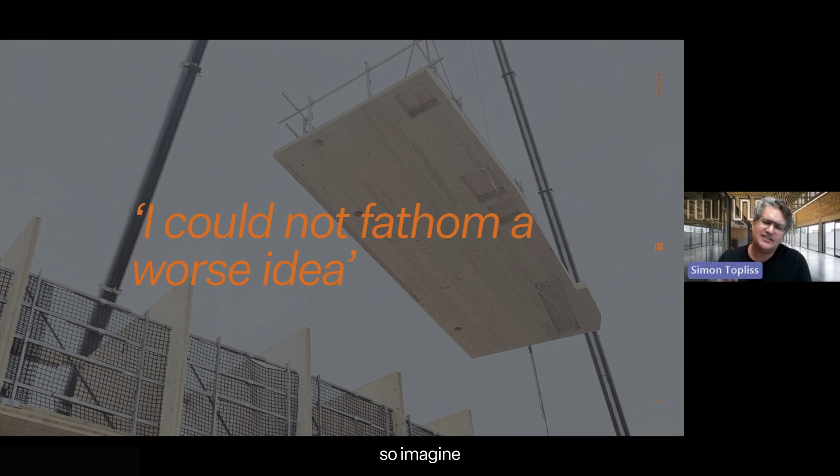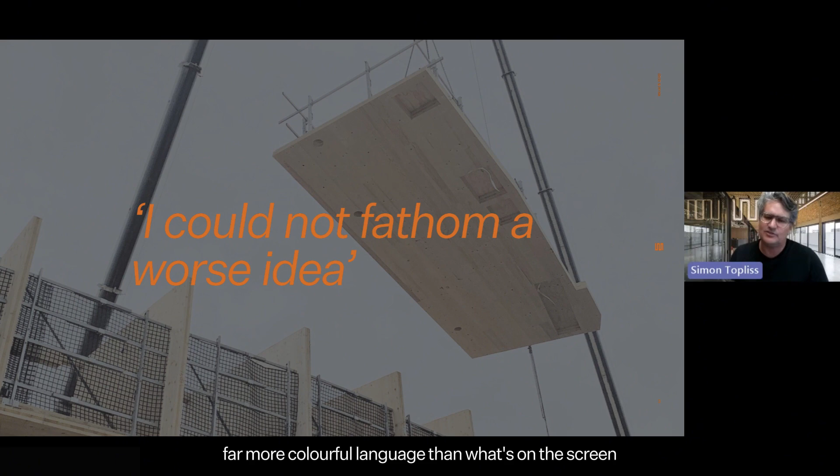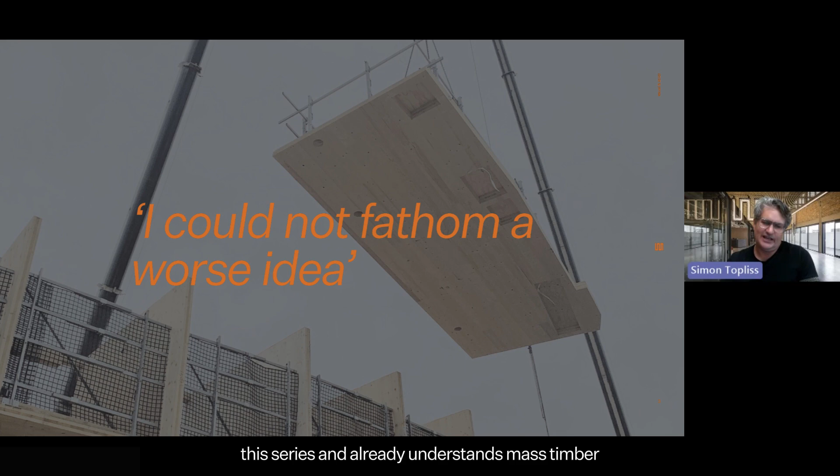So imagine you're sitting beside me in the project meeting where cost is being aggressively interrogated on every front. And Daniel, the QS, leans back and says, in far more colourful language than what's on the screen, I cannot fathom a worse idea than using this. But here we are amongst timber friends in this room, this series, and already understands mass timber, I hope, or at least wants to go on that journey.

Its design challenges, structure, fire, carbon, prefabrication. And hopefully you don't need convincing. The real issue is this. In Australia and New Zealand, the construction industry is not set up yet to say yes to timber. But we are set up to say yes to what we already understand, to what we can benchmark, to what we can price quickly, to what feels safe.

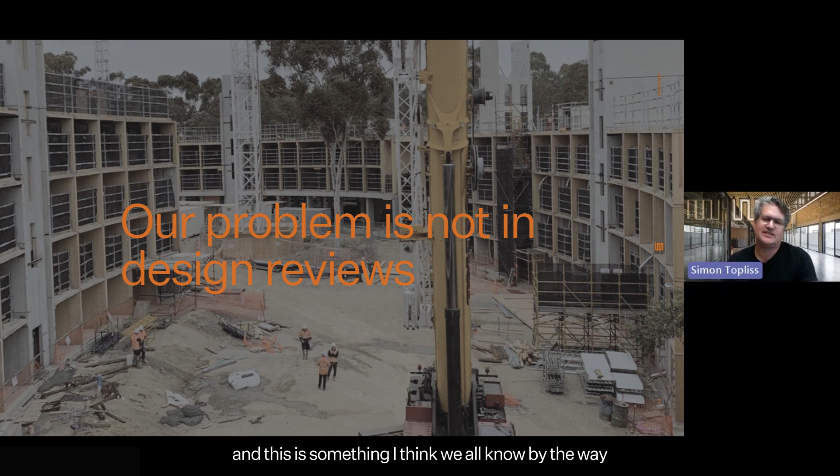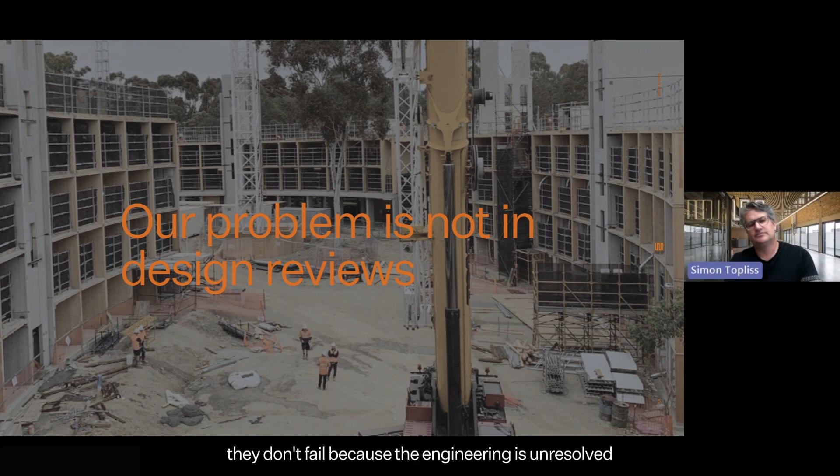And here's the uncomfortable truth, and this is something I think we all know, by the way. Timber projects don't fail in design reviews. They don't fail because the details are wrong. They don't fail because the engineering is unresolved. Timber is lost in boardrooms. Timber fails when the conversation shifts from design to risk, from intent to cost, from possibility to lack of certainty.

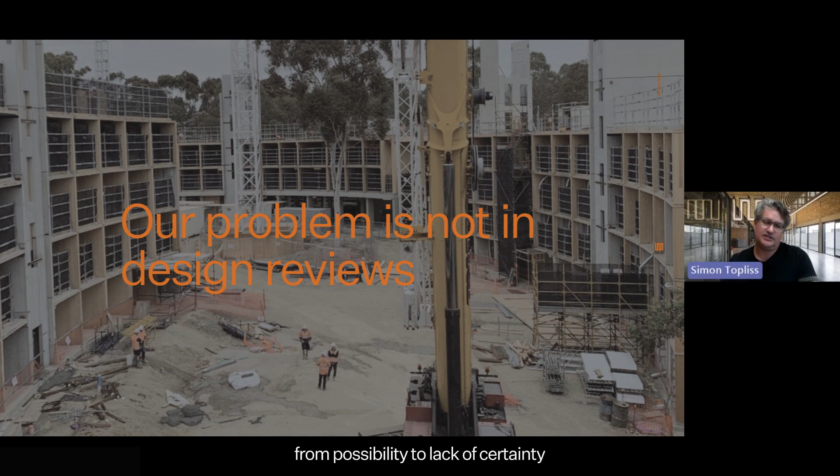And so on our journey over the last few years with Daniel, the QS, and others who have since followed, we realized that we needed to stop trying to convince people that timber was good, because that argument doesn't cut through the board report. So instead, we asked a different question. What if timber isn't the hard part? What if risk is, cost is, approvals are? So this talk is about designing for the reality of our industry and the tools our teams are using every day to navigate mass timber from design to reality.

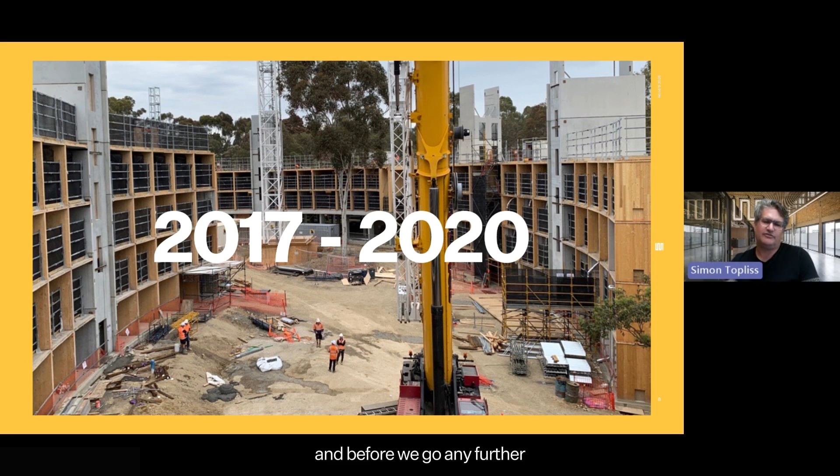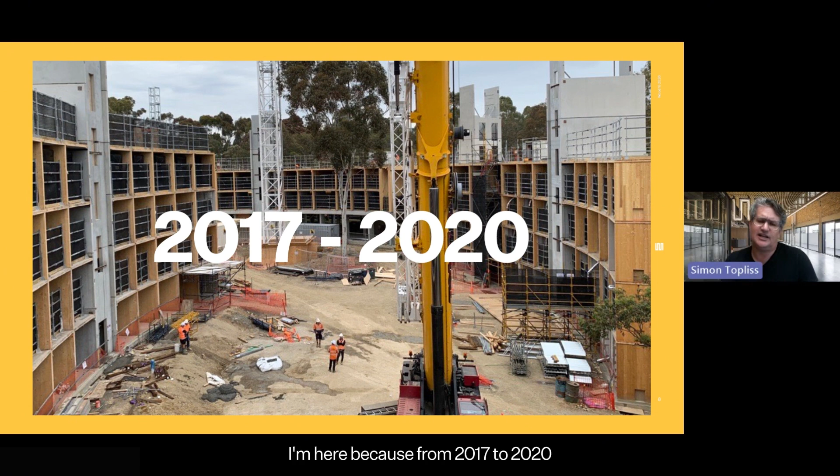And before we go any further, I want to be clear about where I'm coming from as an architect. I'm not here to speculate. I'm not here to sell an idea that I haven't tested in the market. I'm here because from 2017 to 2020, I led the architectural design teams at JCB Architects that delivered two of Australia's largest residential mass timber projects.

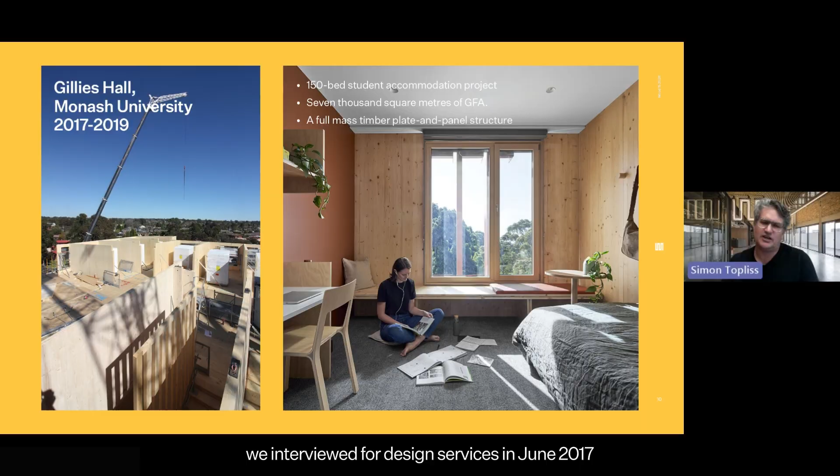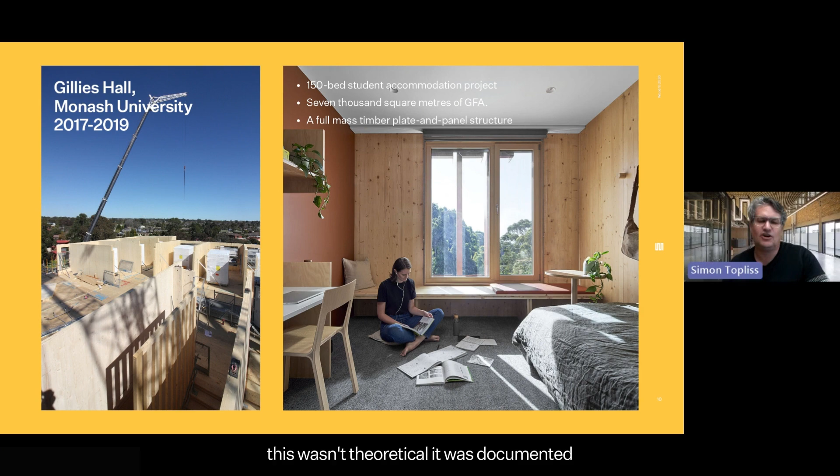Gillies Hall, a 150-bed student accommodation project for Monash University, 7,000 square metres of GFA, Australia's largest passive house certified project when built, complete with a full mass timber plate and panel structure, supplied out of Italy and built by Multiplex. We interviewed for design services in June 2017, and students moved in 20 months later in February 2019. This wasn't theoretical. It was documented, costed, tendered, built.

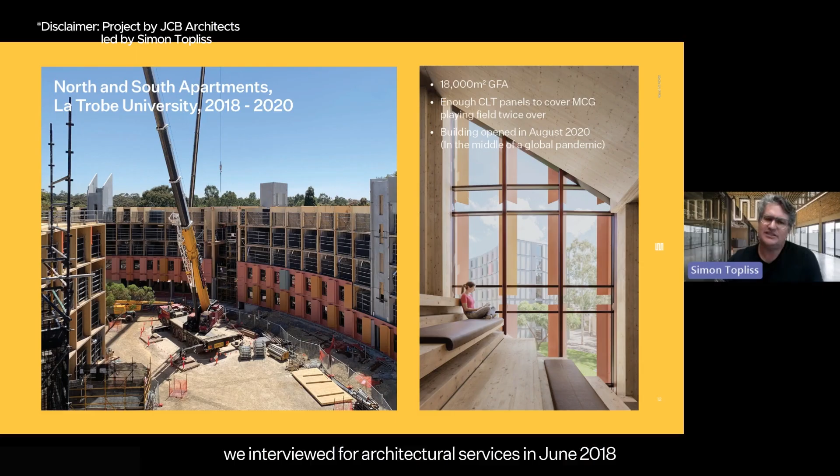And following that, La Trobe University's North and South apartments, nearly 18,000 square metres of GFA, a CLT panel and plate structure supplied and built by the same team. We installed enough CLT panels to almost cover the MCG twice over. It felt like we had changed the playing field. We interviewed for architectural services in June 2018, and the buildings opened 26 months later in August 2020, in the middle of the global pandemic.

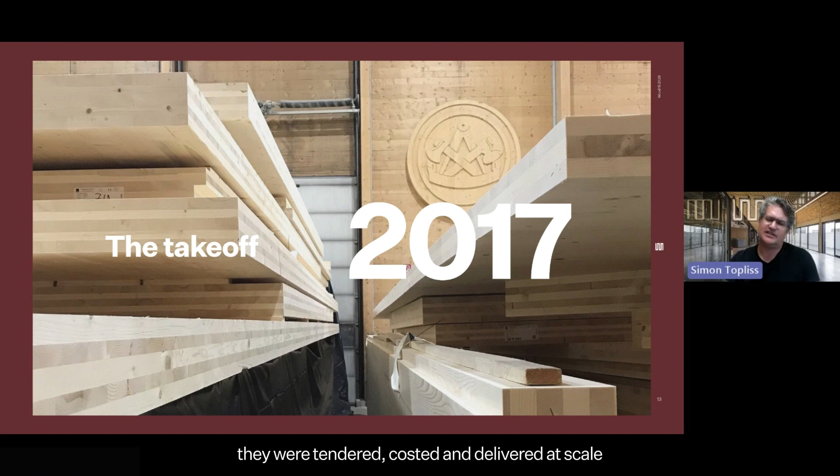We may not have had students to sleep in their rooms, but we were operational. And that matters because it really proved something about certainty. These weren't concept projects. They were tendered, costed, and delivered at scale. What started in 2017 on my visit to a factory in Italy became two of Australia's largest mass timber buildings. In La Trobe and Monash University, we had clients who were willing to back innovation and carbon leadership.

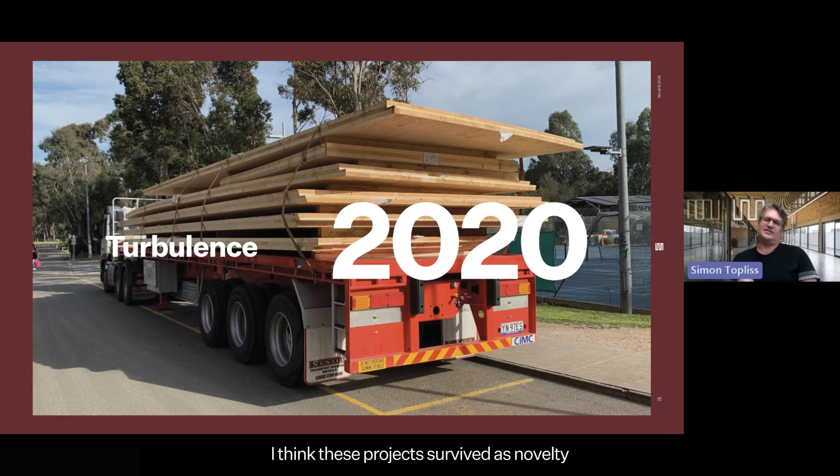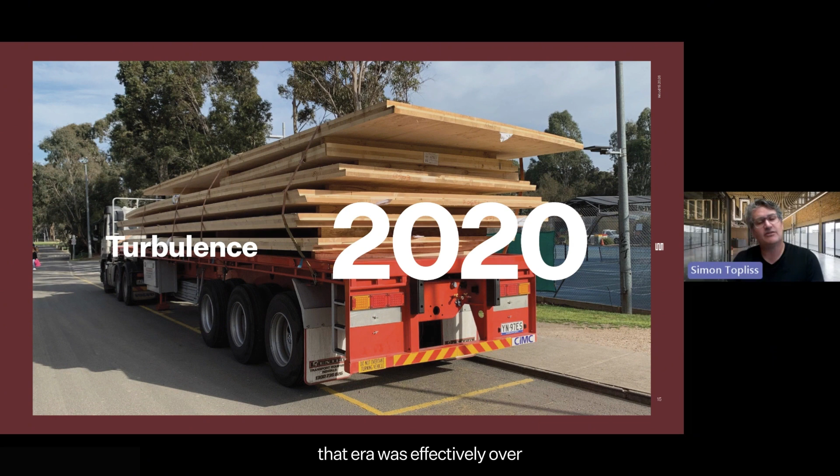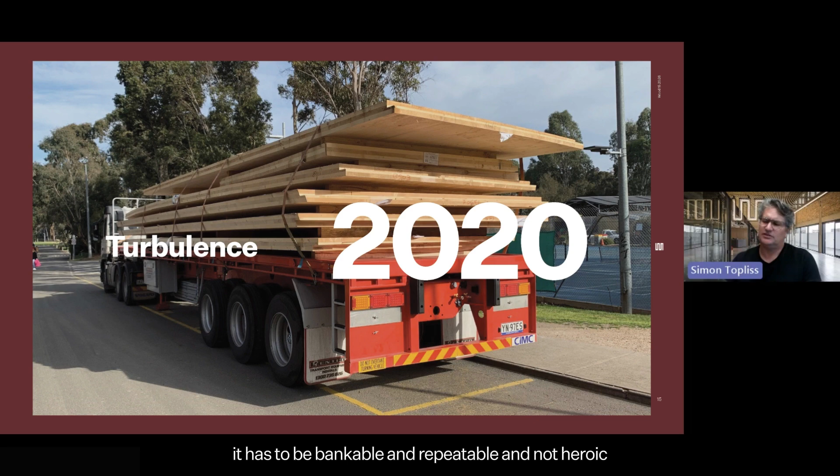What I underestimated was how hard the real world pushes back once the novelty wears off. And on reflection, I think these projects survived as novelty, one-off buildings, backed by exceptional clients, delivered under very special conditions. By the end of 2020, with La Trobe complete, that era was effectively over. When I left JCB and joined WAM, one thing became clear. If mass timber is going to matter in the real world, it has to be bankable and repeatable and not heroic. And if that sounds theoretical, let me ground it.

Because once novelty is gone, the only thing that matters is whether timber can survive normal market conditions—multiple projects, different clients, different cities, real scrutiny. And in my first few years here, we lost timber on projects.

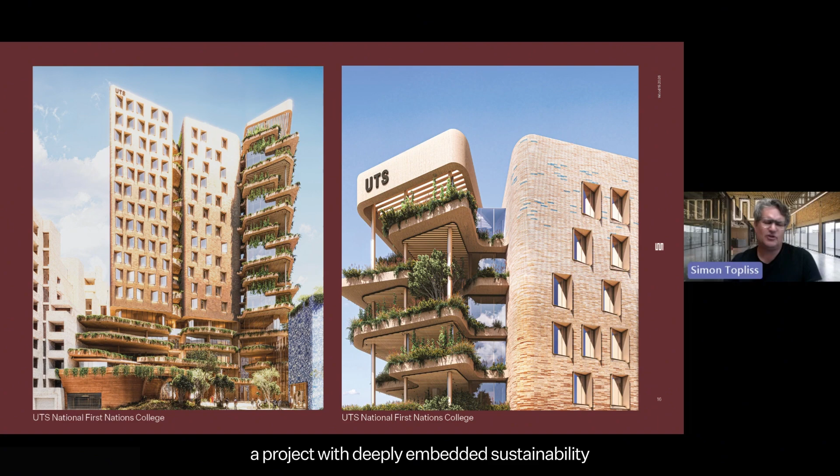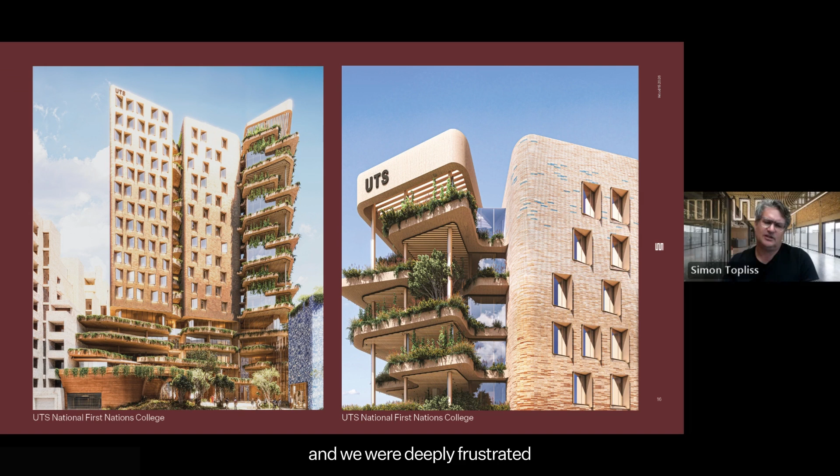The UTS First Nations College, a project with deeply embedded sustainability aspirations, where timber should have been straightforward, was met with a firm market response: there is no appetite and too much risk. We were deeply frustrated, but we've stayed true to course and navigated our way through. And I think we are now seeing a big shift in the market.

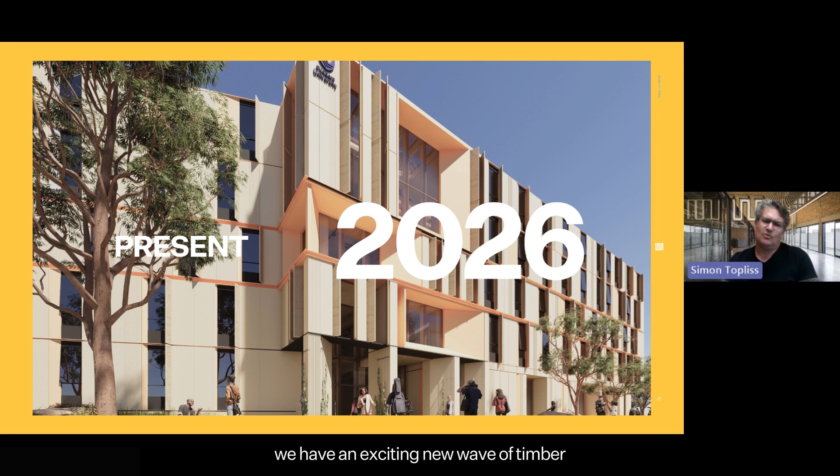So I want to share a little of what we have underway, but more importantly, what tools we're using to get there. We have an exciting new wave of timber residential projects, and they begin to go on site at the end of this year, 2026. Large scale and market tested timber projects.

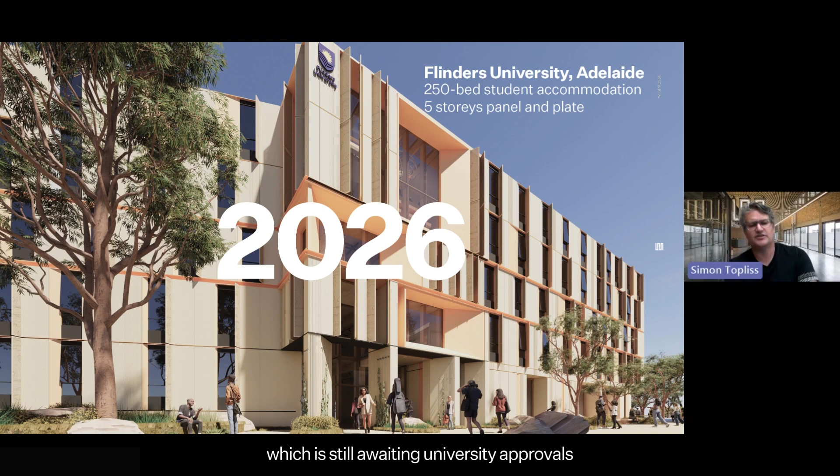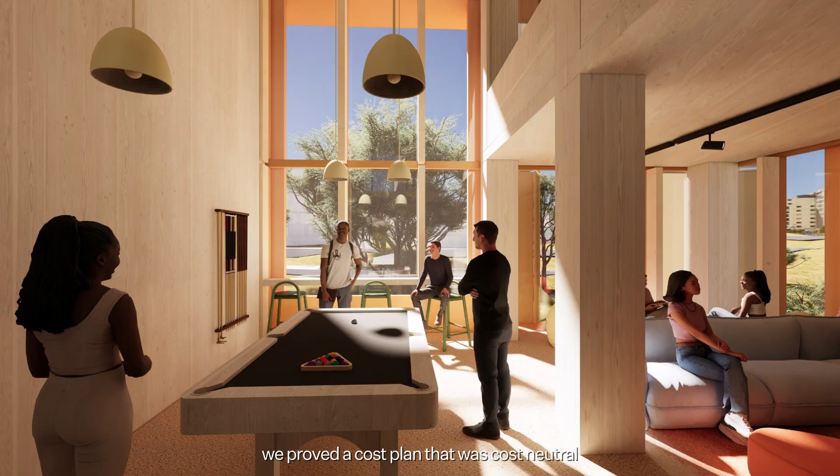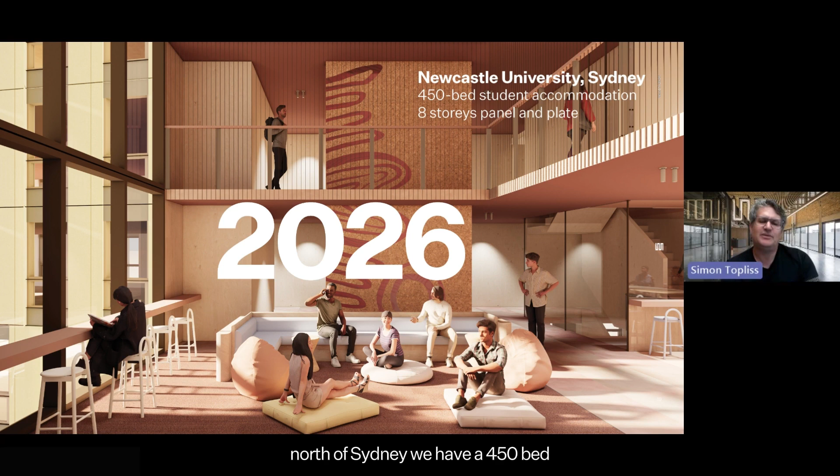North of Sydney, we have a 450-bed student accommodation project for Newcastle University out to tender. Again, full CLT structure. A cost plan that wasn't even initially close to working for timber—we turned it around to be neutral. And we understand that builders who are pricing it are incredibly receptive to the approach we've taken.

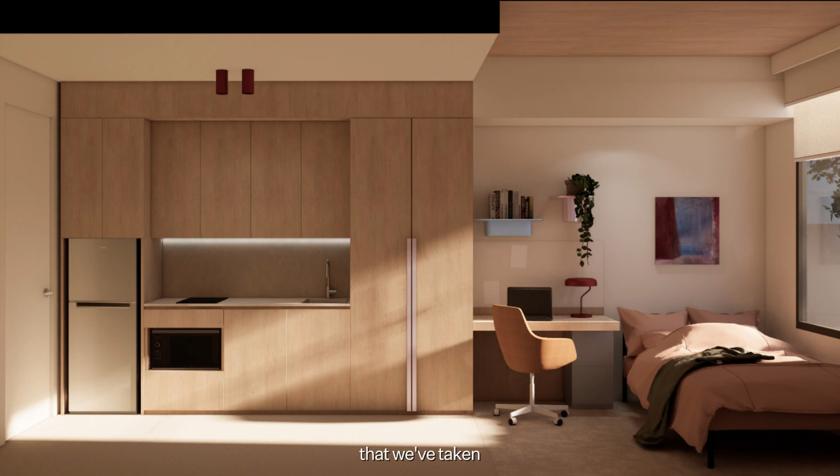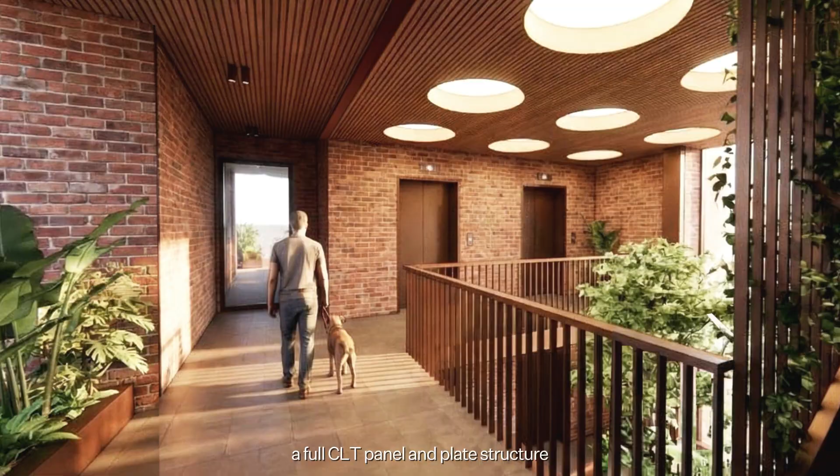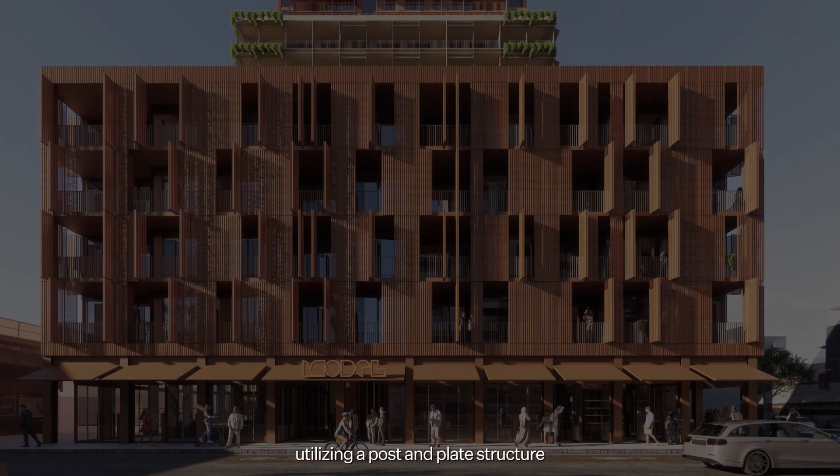And in Melbourne, we're working with Model, a client absolutely committed to changing the sustainability story. The Cordial Factory: 155 build-to-rent apartments, a full CLT panel and plate structure. And for the same client, 276 Johnston Street: 225 build-to-rent apartments over 17 storeys, utilising a post and plate structure. Both aim to be on site by the end of this year.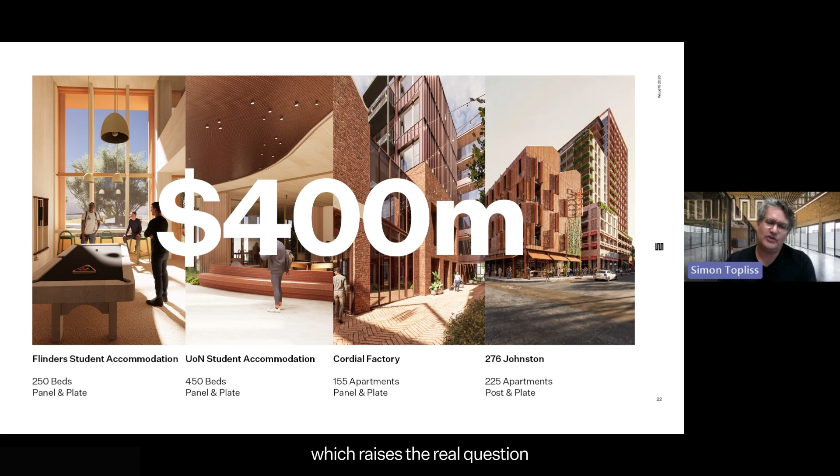Combined, that's almost $400 million worth of mass timber projects. This isn't a highlight reel. For us, it's momentum, and we believe real change—which raises the real question: where are all the other projects? Why do so many good timber projects still fail in 2026?

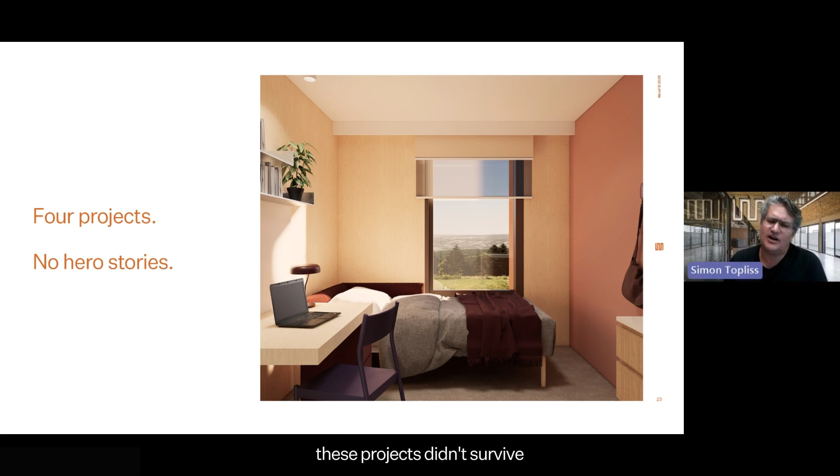These projects didn't survive simply because the clients were enlightened. They didn't survive because our teams were braver than everyone else. They survived because we worked the problem. These are large, real, market-facing projects. And trust me, we almost failed.

They were costed poorly. They were challenged without the right facts. Our credibility was seriously questioned. Cost panic, installation anxiety, supply chain fear, wild assumptions. None of this was about structure. None of this was about design. None of this was about fire. None of this was about whether timber really worked.

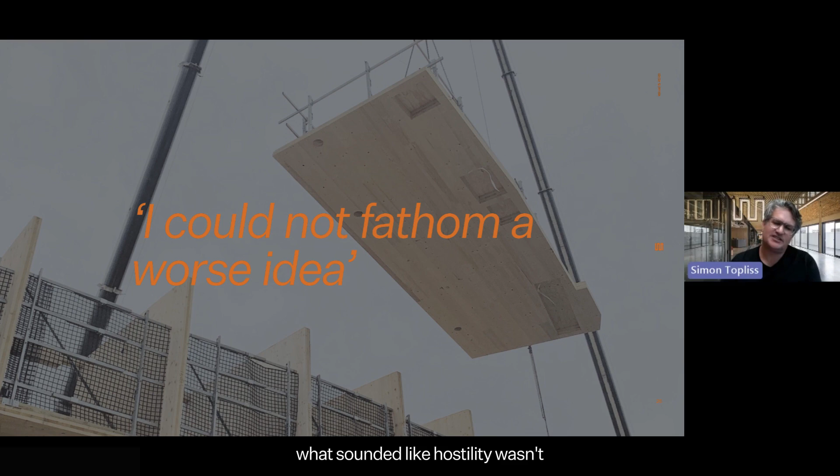What sounded like hostility wasn't. What sounded like conservatism wasn't. It was uncertainty speaking out loud. We realized beyond design workshops, there was simply no point trying to sell timber harder. Those qualities we believe in—embodied carbon, the authenticity of material, warmth, innovation, even speed—it never works, because belief is not a substitute for certainty.

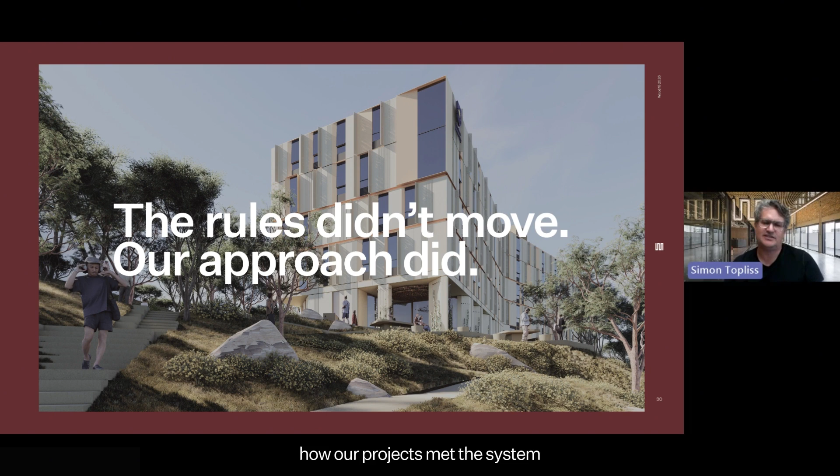So we stopped selling timber and focused on one thing: de-risking it. And that shift changed our thinking completely. The rules didn't move. The market didn't change. We did. We rethought and redesigned how our projects met the system, how they got to site, and focused on how cost certainty was built, not hoped for. That's where the real work began.

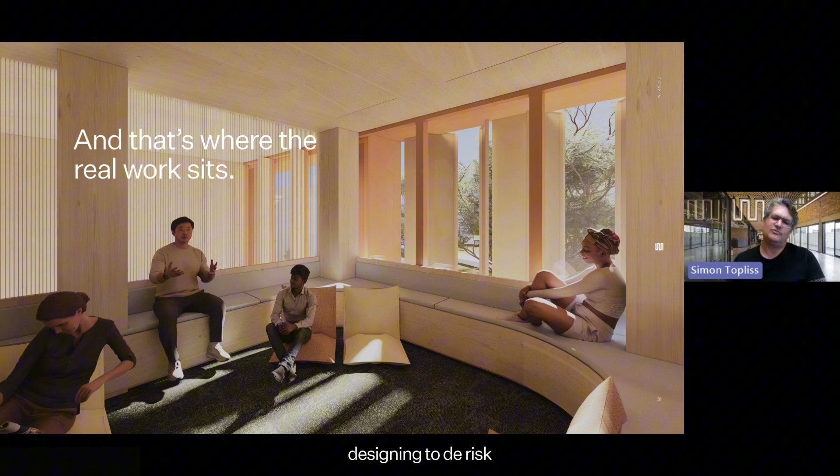Designing to de-risk timber isn't about belief or persuasion. It's about method. So let's talk about the tools. Tool 1: design for cost legibility. If it can't be priced, it can't be defended. And this is the rule where most timber projects break first.

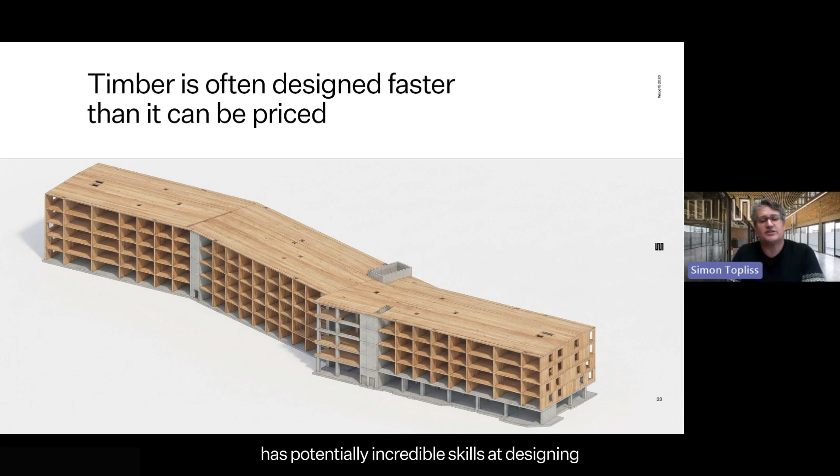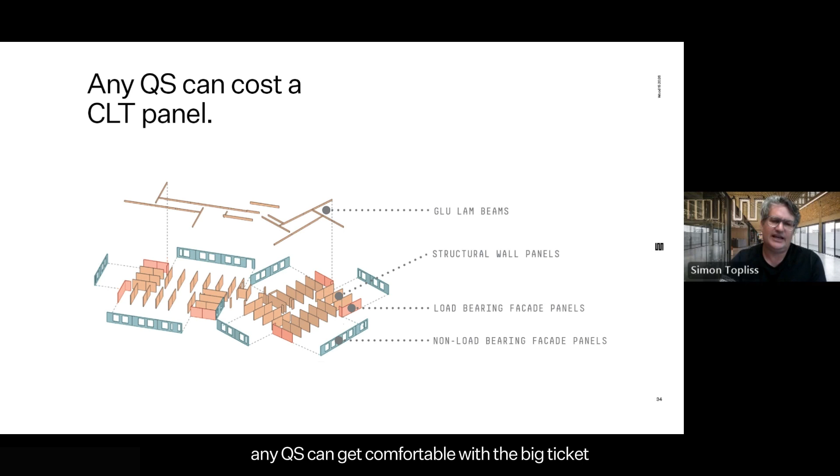Everyone on this call, no doubt, has incredible skills at designing optimized structures and knocking out that first concept. The issue is we then always ask the QS to second guess and catch up. That's backwards. Any QS can get comfortable with the big ticket timber elements—the panels, the beams, the volume rates. That part is really legible. Where the cost logic falls over is everything around it: penetrations, protections, connections, plates, tolerances, imperfections, carriage and cranage, etc.

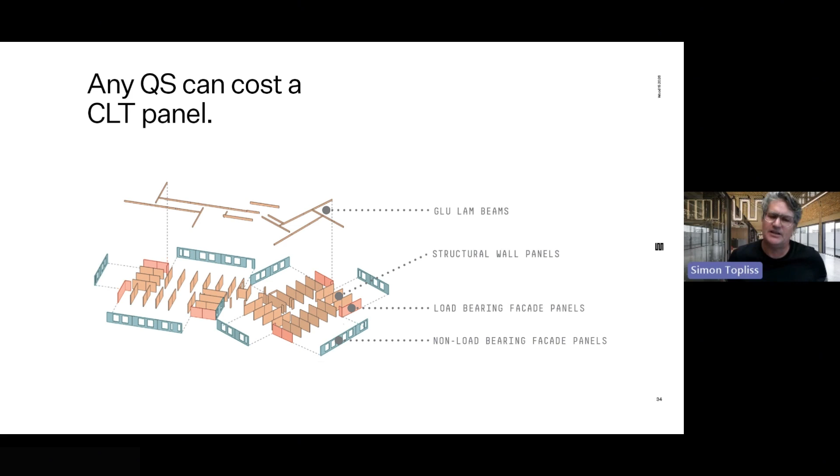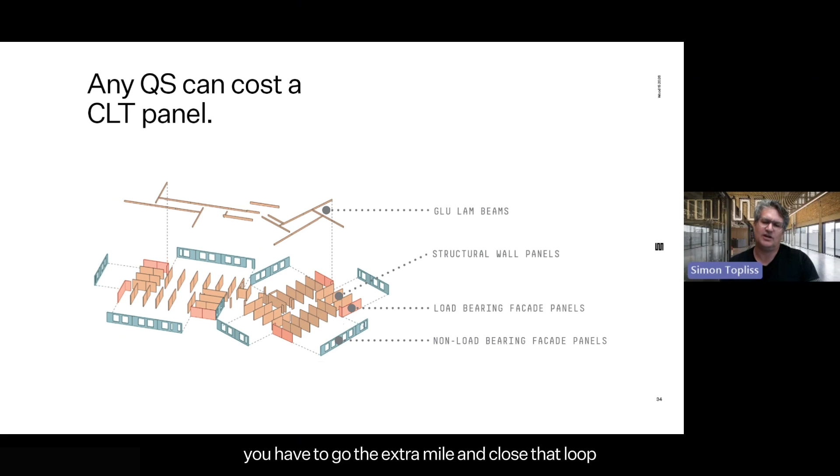And when the QS can't see those costs clearly, they do what the system asks them to do—they protect the budget with contingencies. Not because they're anti-timber, because they're anti-surprise. So if you want your timber project to survive, you have to go the extra mile and close that loop. Make the interfaces priceable, make the build sequence visible, and remove the unknowns before they get priced as fear.

So we stopped asking the QS to imagine how the building might work, and started showing them. We closed out the penetration and protection strategies. We defined an approach to connections that minimized site labor. We made sure installation assumptions were explicit. We recognize that timber is a system.

When you do this, contingencies shrink—not because costs drop, but because fear does. You're not eliminating risk, you're making it visible and therefore manageable.

Tool 2, installation is a design issue. Uncertainty kills confidence faster than cost. If people can't picture how it gets built, they sidestep benefit and assume risk. And in an adverse market, that's all it takes for confidence to evaporate.

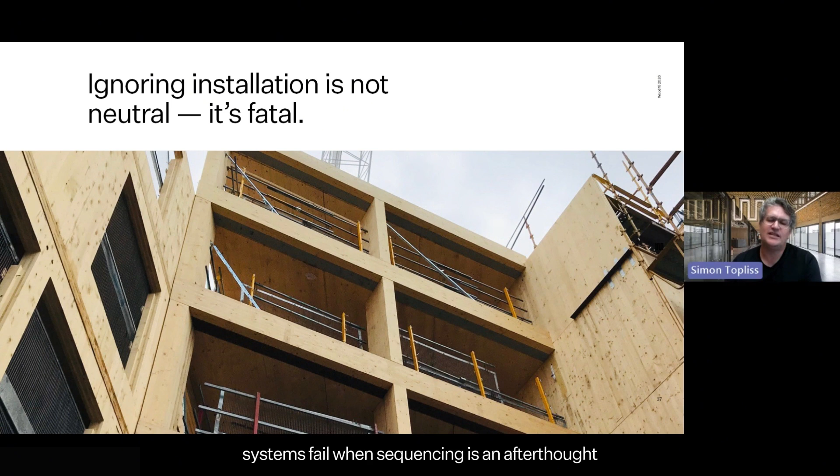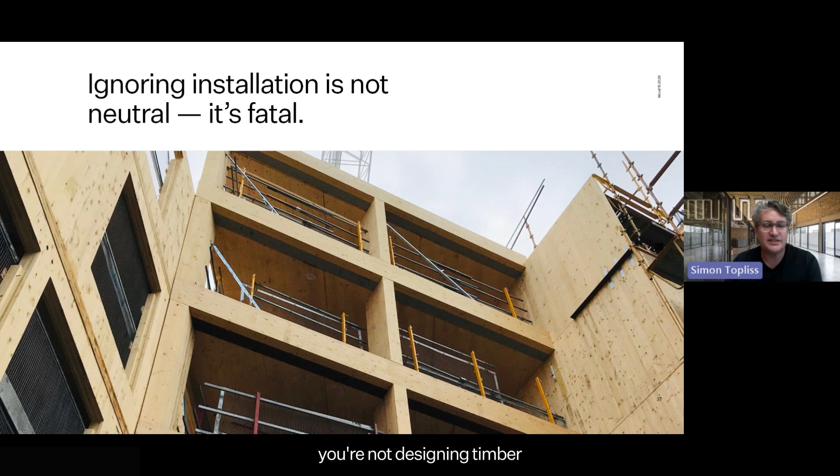Timber is a system. Systems fail when sequencing is an afterthought. Mass timber lives or dies on installation. If you're not thinking about sequencing, access, lifting, and adjacent trades, you're not designing timber, you're simply sketching it. Leaving installation to later doesn't delay risk, it concentrates it. Your QSs and project managers will see straight through you.

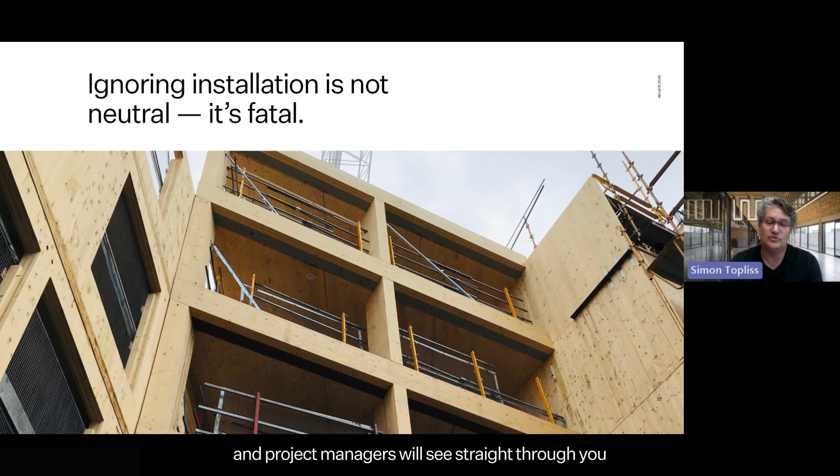So we started refining the build before we drew the details. We think about the lamella and the time on the fabrication bed. We think about containerization and transport. We think about lifts and cranage. We think about panel sequencing. And we think about how hard to remove complexity and to simplify and accelerate the trades that follow. When the sequence is clear, timber stops feeling risky.

Tool 3, we drag the market in early. Saying we'll test the market at tender is the moment the project starts dying. It's not testing, it's validation of failure. By then, risk is baked in, positions are entrenched, and the only option that still feels defendable is concrete. Not because it's better, because it's familiar.

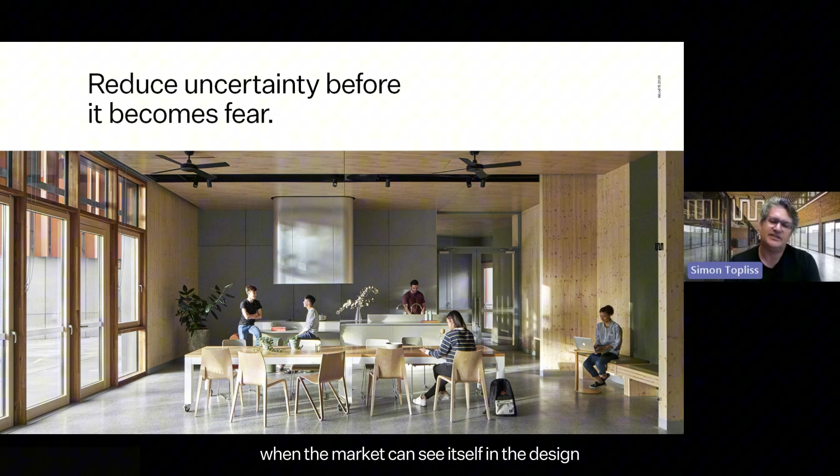We speak to suppliers, installers, and contractors while the design is still fluid. Not to ask permission or dimensional tolerances, but to understand constraints, sequencing, and risks that only appear once you've built these systems before. When the market can see itself in the design, confidence follows. Taking a hybrid approach, designing out glulam beams to remove fire-rated penetrations, wasn't selling out an all timber design. It's about making it easier for the market to deliver. That's when the market stops pushing back and starts engaging.

Tool 4, kill bad assumptions early. Unchallenged assumptions are how good projects quietly die. Every timber cost plan carries assumptions about fire, tolerances, protection, sequencing, and supply. And if you don't confront them early, the market will assume the worst.

Earlier last week, a colleague working on a building in Auckland said to me, 'Simon, how do I optimize the design? The QS was telling me the CLT floors are $500 a square meter once you consider all the add-ons, and the concrete tray deck is $150 a square meter.' I said, 'Tom, the design is not the issue, you need to get forensic on their assumptions.'

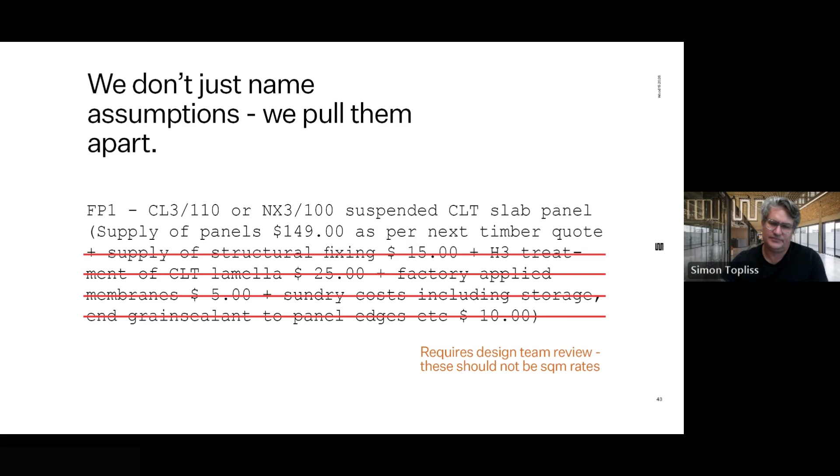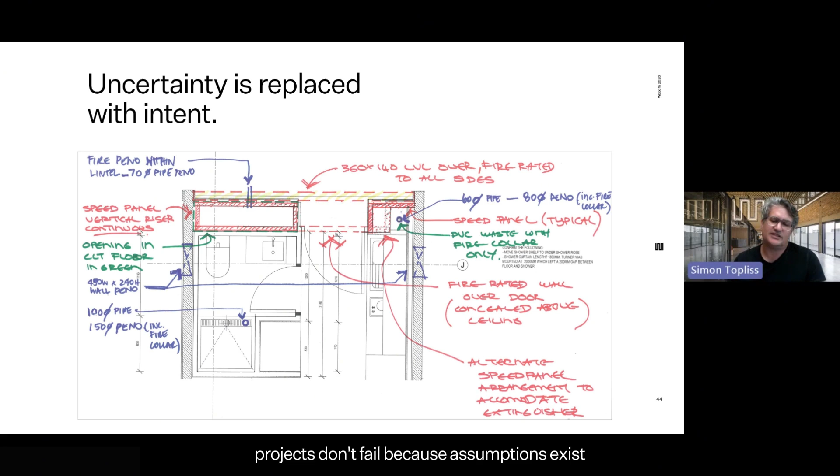So we drill into the intent behind the detail, the factory costs, the wall build-ups, the fire protection logic, the installation complexity. We test what's driving uncertainty, not just where it shows up. And we do it early, while the answers are still cheap. When the intent is clear, the factory can price it, the builder can sequence it, and the QS can benchmark it. Projects don't fail because assumptions exist. They fail because no one knew how to dismantle them.

Tool 5, speak the board's language. Boards don't approve buildings, they approve risk. Boards aren't there to debate materials, they're there to protect the institutions. They don't ask, is timber exciting? They ask, can it be defended if it goes wrong?

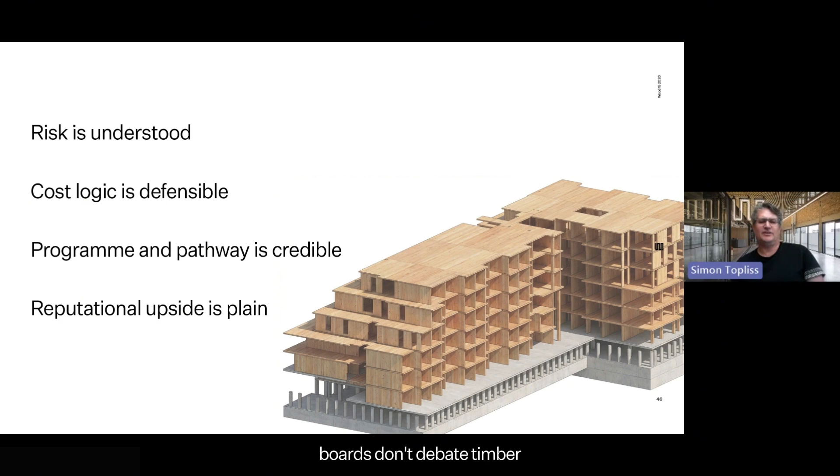Risk, do we understand it? Is the cost logic defendable? Is the program and pathway credible? And what is the reputational upside, is it real? When these four things are clear, boards don't debate timber, they approve the project. If you can't say these four things with utter confidence, the board will quietly say no.

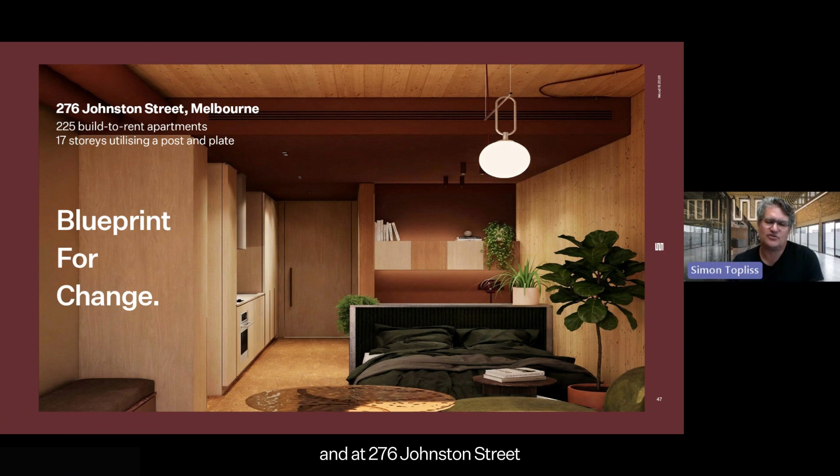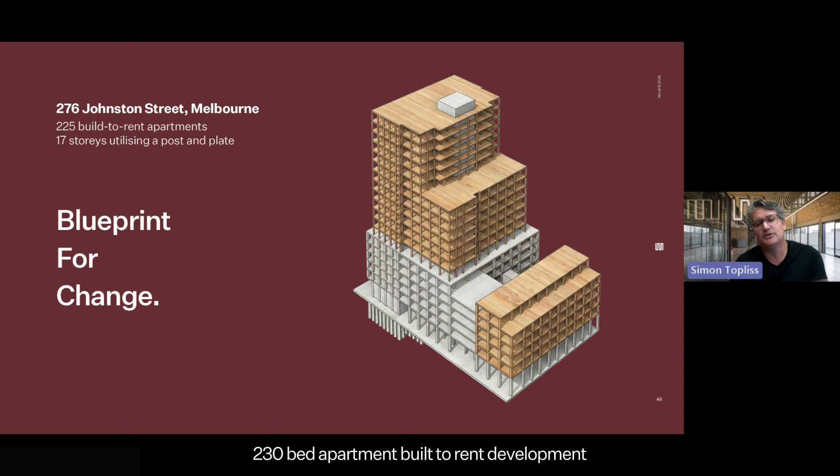I want to finish by grounding this back in something real. My team in Melbourne is applying this blueprint right now on the four projects I shared earlier, not as theory, but as practice. And at 276 Johnston Street, we're delivering what we believe will be an industry shifting project: a 17-story passive house certified, 230 bed apartment build to rent development with mass timber locked in through the consenting process. That didn't happen because timber was exciting. It happened because the logic was disciplined.

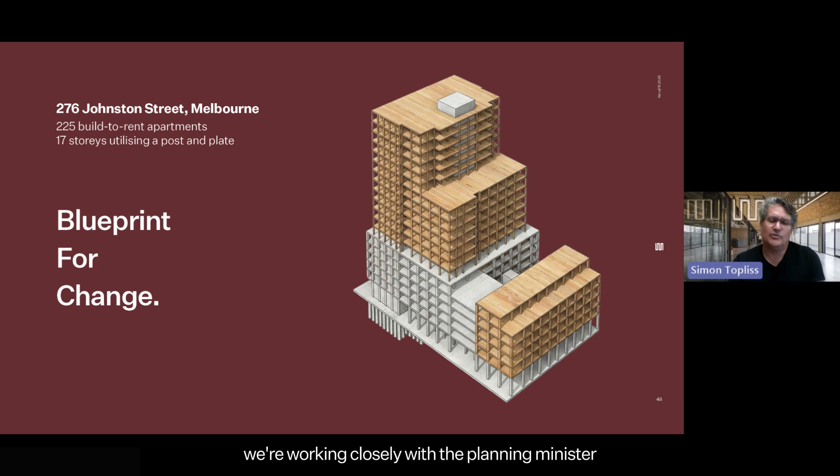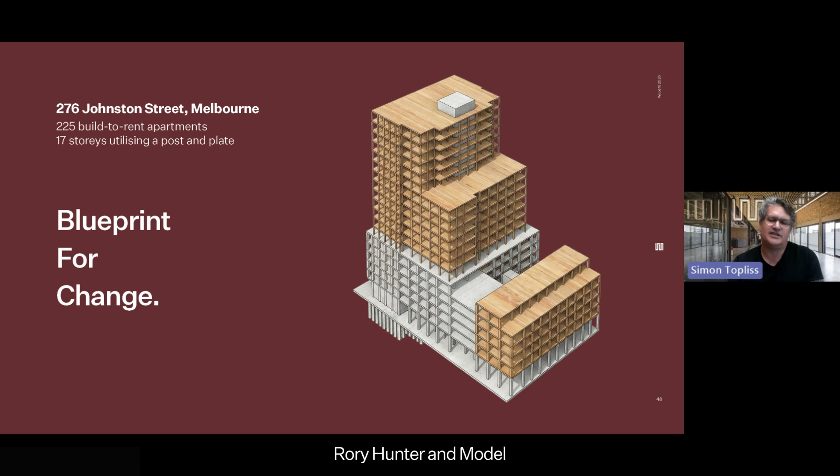We're working closely with the Planning Minister and the Office of Victorian Government Architect to demonstrate carbon leadership, certainty that they can stand behind. And we're doing this with an exceptional client in Rory Hunter and Model, who understands what a blueprint for change really means: method over rhetoric. And he also recognises we need the market alongside the projects.

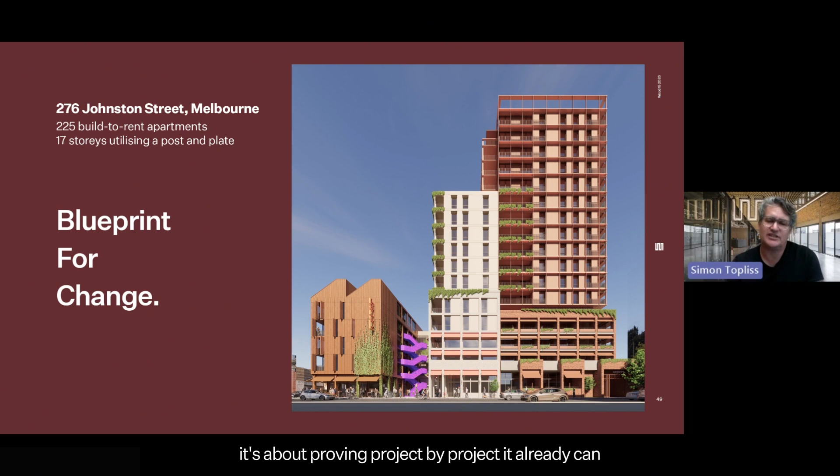This isn't about waiting for the market to change. It's about proving project by project it already can. By being on this call, you're already, I hope, on the timber journey. So if in the last 20 minutes I've given you even one new tool to navigate the path in front of your projects, well, that's enough.

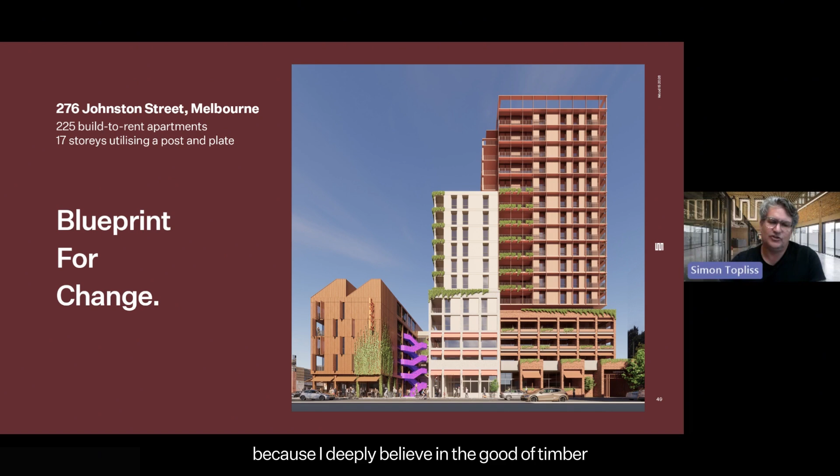And it's important to me because I deeply believe in the good of timber, because I firmly believe in the authenticity of timber, the warmth it brings to the interiors of our work, the generosity it especially shows in residential architecture. I firmly believe that mass timber can take us away from the mire, the mud, and the mess that are traditional building sites into a new paradigm of off-site, prefabricated, modular, and hyper-efficient construction that is ultimately going to help us deliver better and more cost-effective outcomes for our communities.

And I fundamentally believe that mass timber, if sourced and manufactured responsibly, is a critical tool in unlocking carbon reduction in the construction industry. Because the real question isn't whether timber works, it's whether you're willing to challenge the status quo and effect your own blueprint for change. It's your move. Thank you.